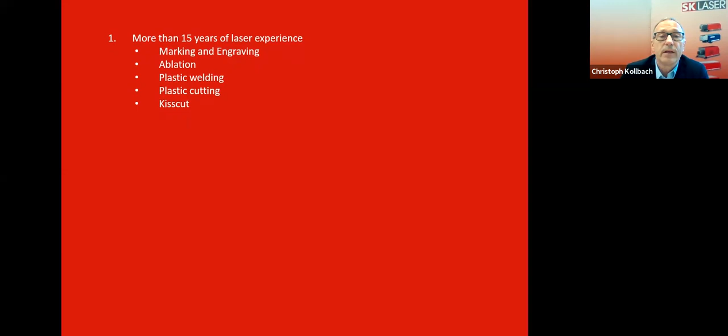Who is SK Laser? Well, there is more than 15 years of laser experience in marking and engraving, ablation, plastic welding, plastic cutting, and kiss cut. I will give more information about these lasers.

We provide industrial laser solutions like standalone machines, semi-automatic machines, and fully automatic machines. These are all made in Germany, and we are located in Wiesbaden, which is 15 minutes from the Frankfurt airport. And we do also deliver the machines to Israel, and we would give training and service, of course, with Ehud and his team.

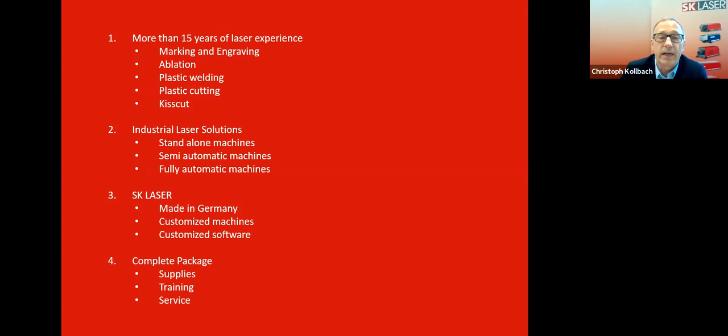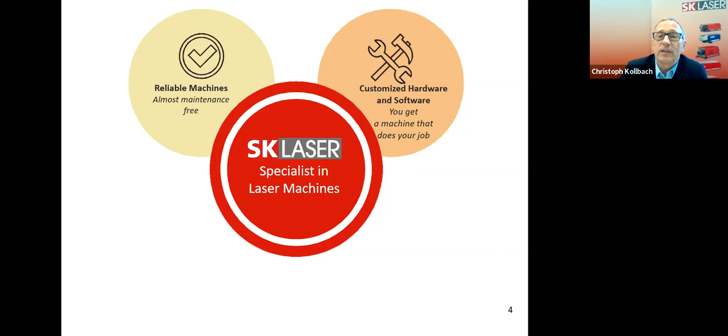So we are specialized in laser machines, and we are very proud that our machines do not break. That means we can deliver them worldwide and they will work. If you need some specialties, we can customize hardware and software so that you get a machine that really does your work. And the most important, it is very easy to use. You don't need a specialist, and you don't need much time to set up a new job.

Well, this is the countries where we have installations, and it's very interesting to see that also not only in Egypt, but in Sudan, there's somebody who bought a machine from us.

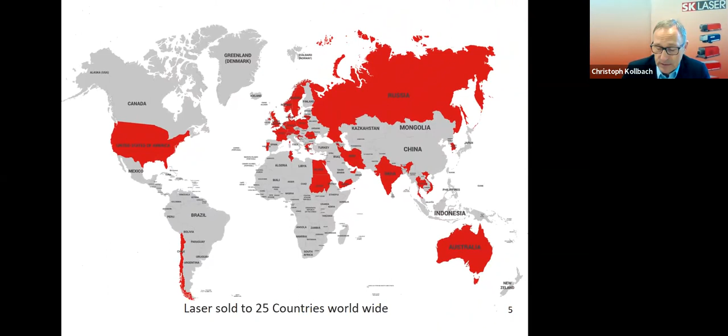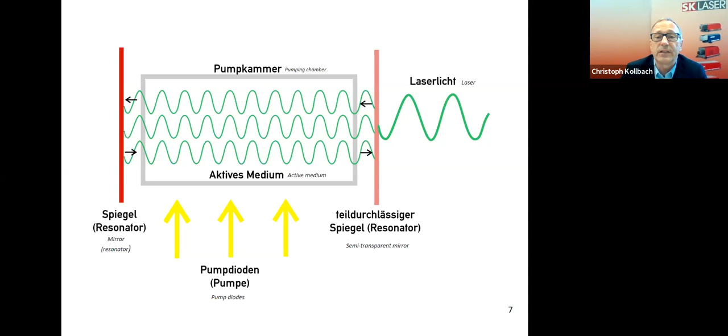How does it work? What is a laser? How is it working? I would like to give you a short introduction. In the center, you have this pumping chamber. It is the so-called resonator, and you pump some light into the resonator, and this activates the photons that start moving between two mirrors, and as soon as the media, meaning the light, the photons are strong enough, they would pass through the semi-transparent mirror and you would have the laser light.

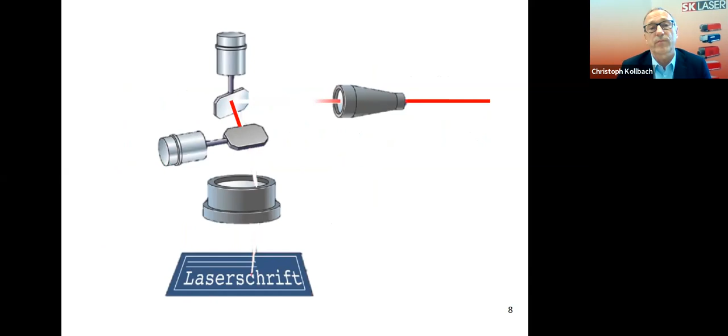As soon as this goes out, it would be directed to a so-called scan head, and the scanner has two of these mirrors, and these two mirrors guide the laser beam through a lens to the object that you want to mark or cut or other.

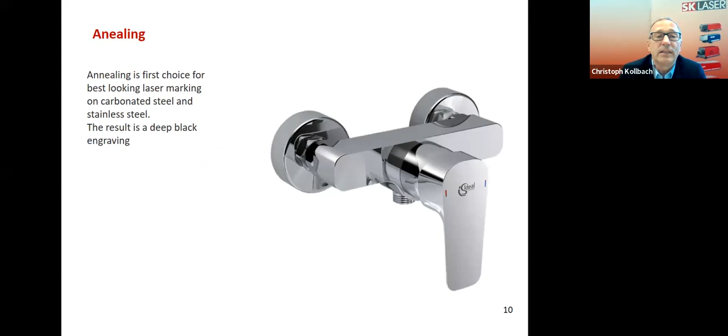Now I want to show some applications. This is interesting. It is a company you know, Ideal Standard. You know this big company. It is a location in Cairo in Egypt, and they bought a machine to mark a number like 1 million pieces per year. And I thought Mr. Mohammed should buy an automatic machine, but he told me labor is cheap in Egypt, and therefore he bought a manual one.

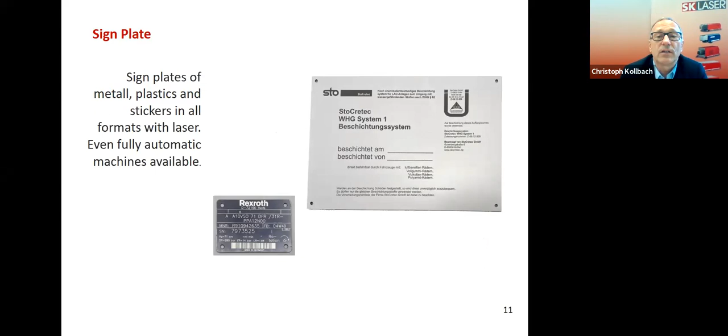This is a plastic marking for modern houses. It is a Bluetooth switch to switch off the light and something like that. And you can see a QR code and some data and a logo.

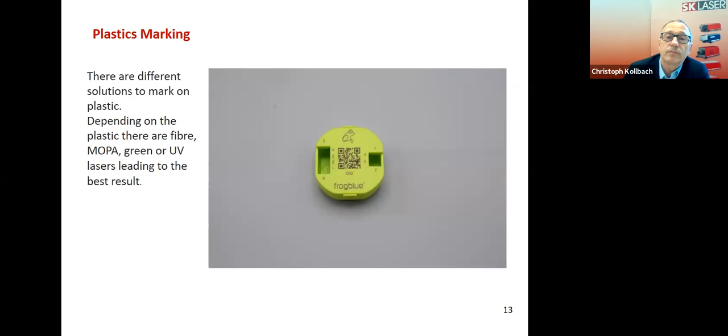This is a copper cable. Cable stripping is very common. You can do this with laser easily and very fast, and you need a lot of power depending on the time you have.

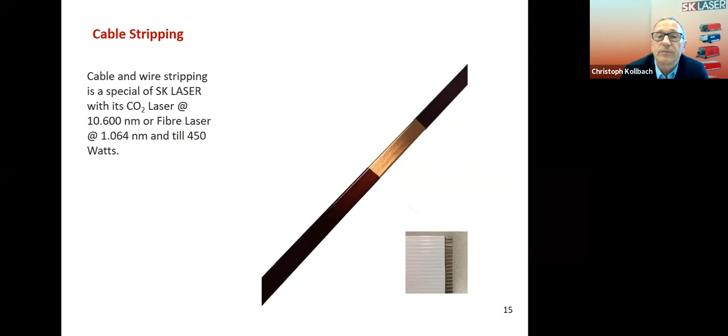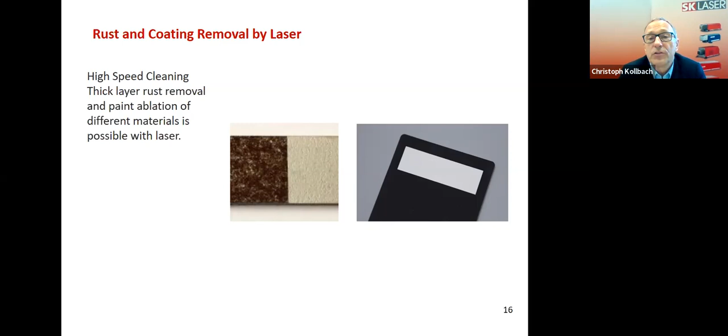This is similar. It is cleaning or rust removal on the left photo. On the right photo, it is just coating, which is removed with a laser.

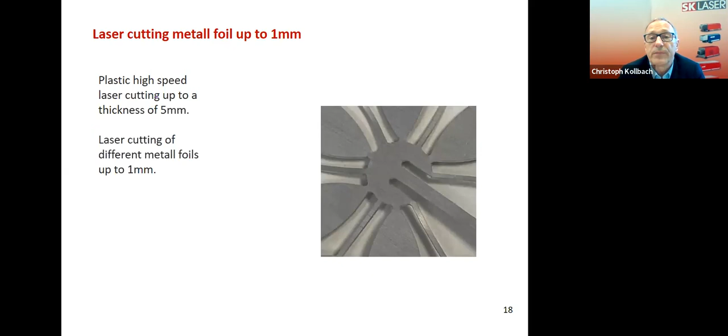Also, we have lasers to cut metal and plastic, but for metal, it is only very thin foil. It is not to cut big steel.

This is also for specialists, for places where you cannot reach the part and where you have to do ablation. Laser is first choice because laser could do flexible, deep, and very fast engraving, and we provide very strong lasers for this.

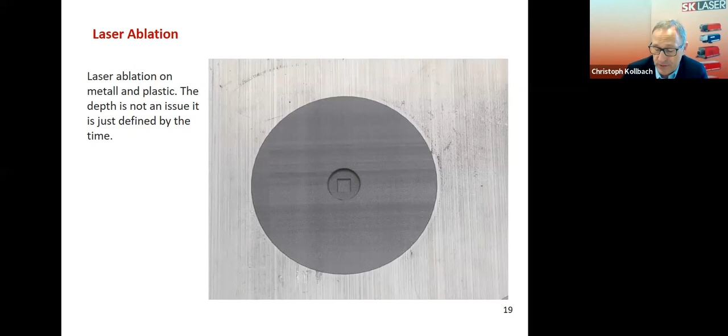This is a specialty: plastic welding. I can show you. This is a part used in automotive, difficult for me to explain, but when you enter your car and put the belt on, it makes a click, and the part that clicks is the silver one in the black.

It is a stainless steel ball, and they wanted to weld the white to the black without disturbing the white. This is possible with the laser because the laser goes through the white without touching the white plastic and melts both together, or welds them.

Another interesting plastic part. Can you explain a bit more about the welding, please? Yes, okay, let's go back. This one? Yeah, this one, okay.

With our fiber lasers, we can weld plastic parts together, but we need one plastic part which is like HDPE natural, so that this laser will not touch it. And the other plastic should be like, for example, HDPE but in black, so that the laser beam will heat the plastic and melt it.

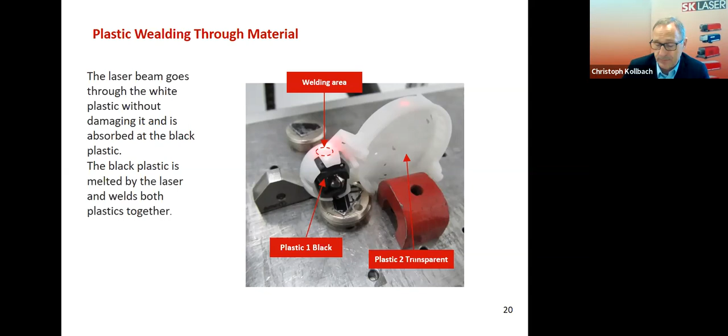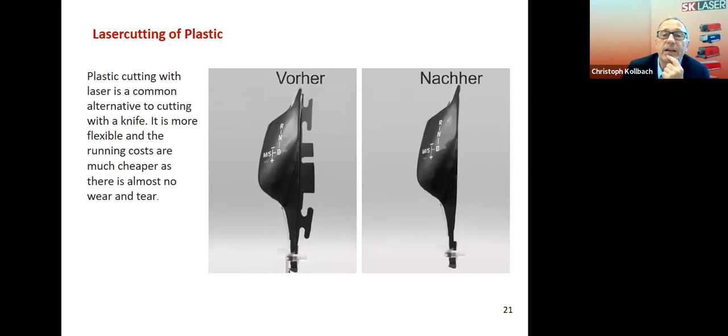And we have very powerful lasers, and we can provide full machines to do this process.

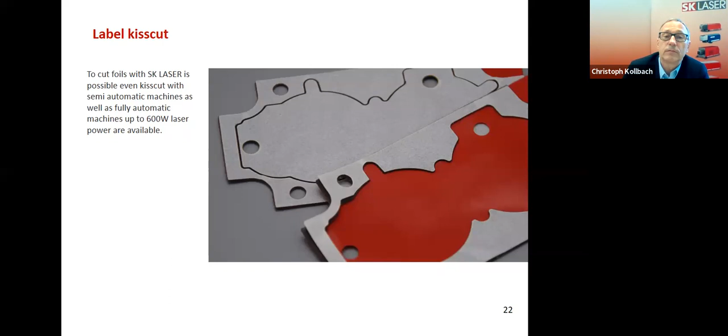SK LASER advantages: so we have a wide range of laser expertise. We can offer customized machines, and we do worldwide installation and training.

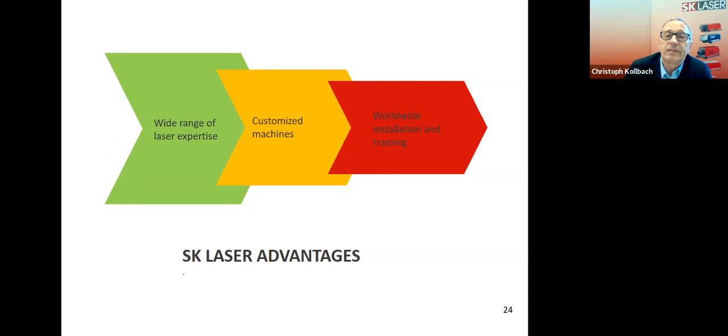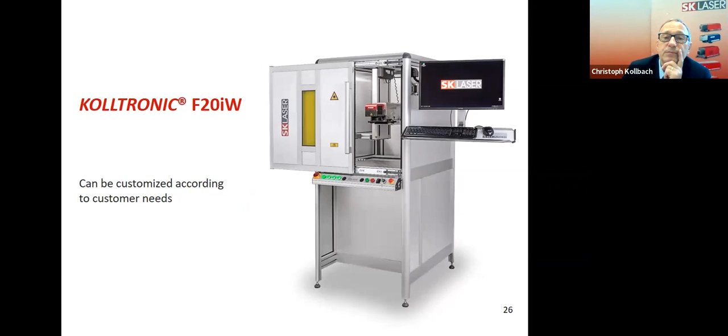So how does it look? This is our standard, let's say, which we can customize according to your needs. If you have a standard machine and the head is fixed, you can only mark at one point. But here with our machine, you can pull and push the head, which gives you more flexibility in the marking area.

There in the background, you see the Z-axis, which is not standing on the table - it is hanging under the roof, which gives you more space under the laser.

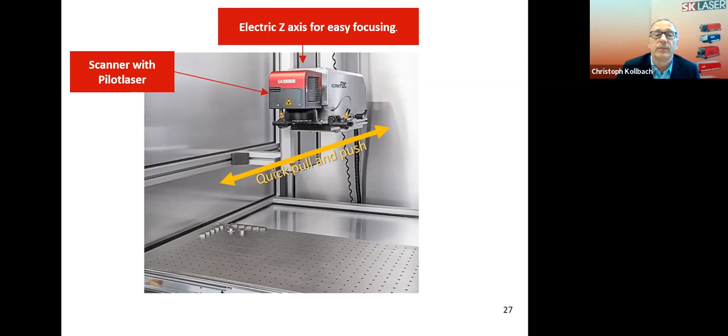This is the scanner, which you saw before, the little scheme with these 2 mirrors. This is 2 magnets and 2 prisms, for quick installation. For example, if you want an angle, you could take these 2 prisms and build an angle, or use the prisms to mark on a round part, like a drill bit.

The working plate, you can use magnets on it for quick installation. We also have these holes - the distance is 25 millimeters and the diameter is 4.1, so that our customers can build their own tablets for marking of several parts in a matrix.

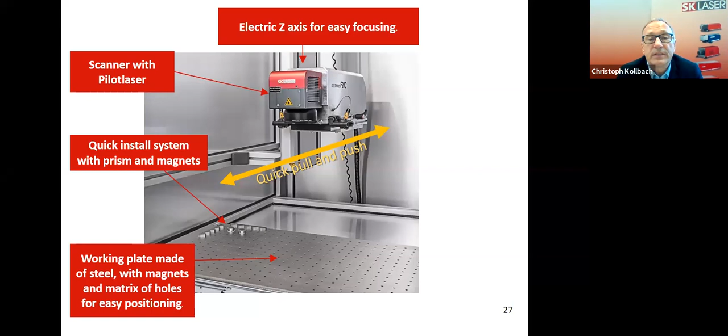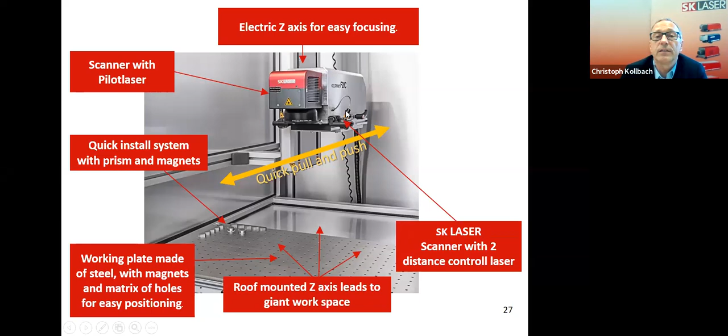This is what I said before, the roof-mounted Z-axis. We have 2 of these. Can you see these? This is a laser pointer. We have 2 of these laser pointers, one here and one here. With these 2 laser pointers, we can control the distance very easily with the Z-axis, you go up and down. And when you see one point, you have the right focus.

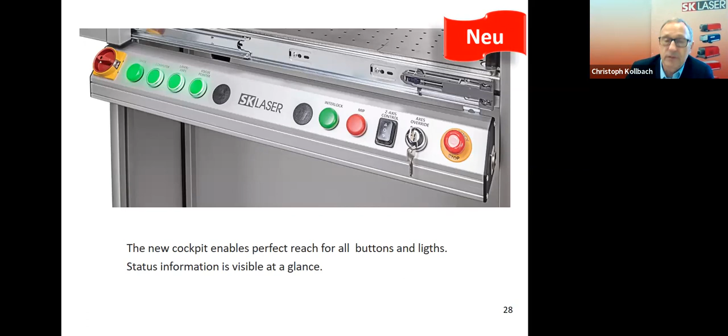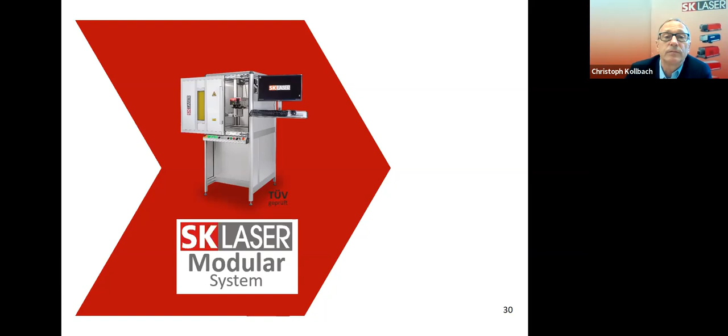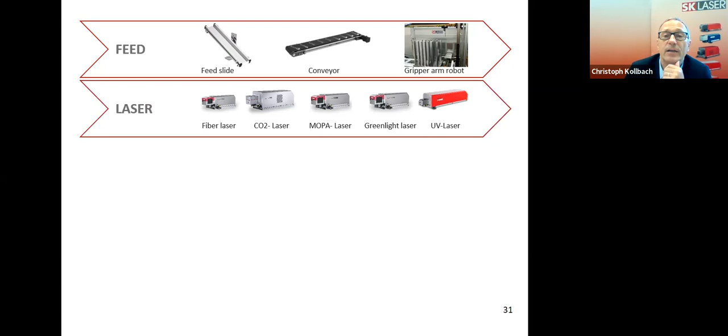And we have a lot of add-ons. If you want to install an automatic machine, you can have feed like a magazine, a conveyor, a robot, or a slide. We have different types of lasers like fiber lasers, CO2 lasers, MOPA lasers, green light lasers, UV lasers for all different purposes, and high power lasers for ablation.

You can order the cabinet in different sizes, depending on your parts. If you want heavy parts, you get a crane loaded machine. If you want to mark multiple parts, you get a sledge or a tunnel, and so on.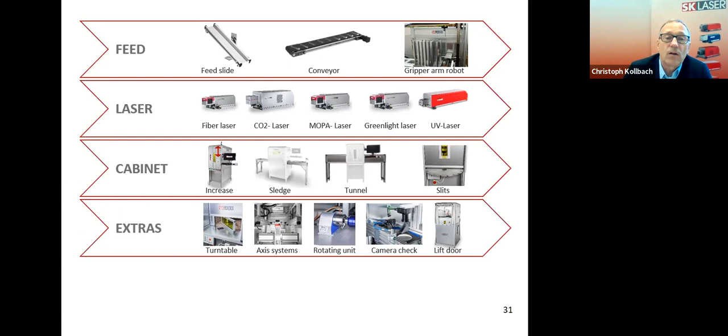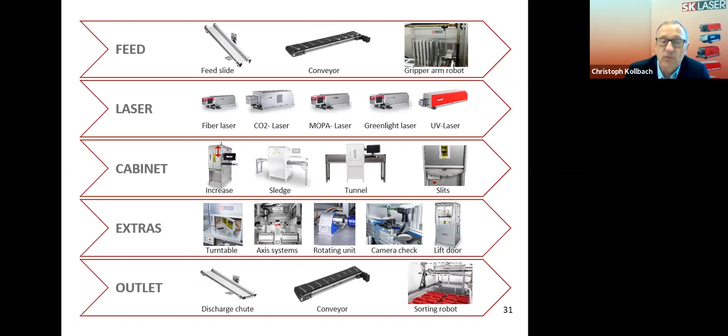We provide all extras which are common in the machinery business, like turntables, axis systems, rotating units, cameras for checking, pneumatic or electric doors, and of course conveyor or a sorting robot at the end. This leads to fully automatic machines, small ones and big ones.

I will show some video to you and show some machines again.

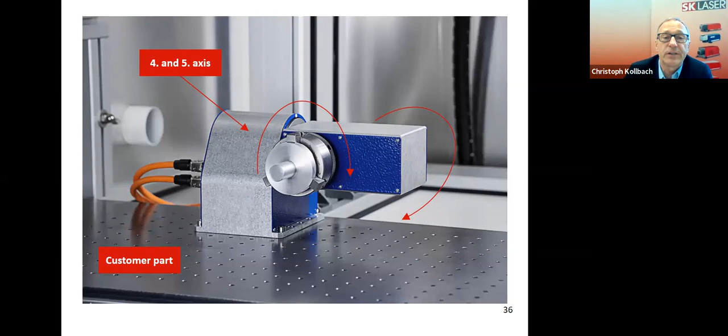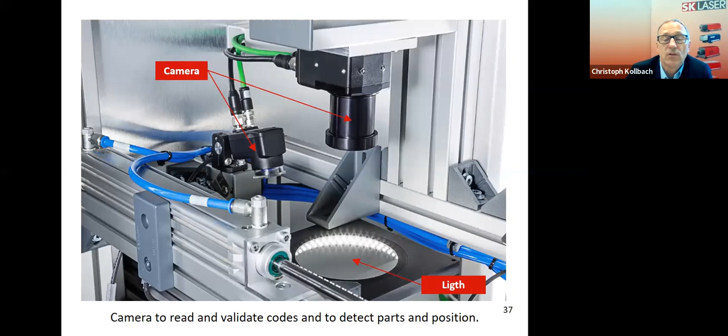This is the 4th and 5th axis, which goes automatically with the software, so very easy to use. This is a camera system that can control data matrix codes after you have marked the data matrix code, or you can control the position of a part.

Mr. Christoph, just one question before.

Is the welding machine also able to mark on parts? Yes, it is. Yes, the welding machine is, let's say, the standard fiber laser. Okay, thank you.

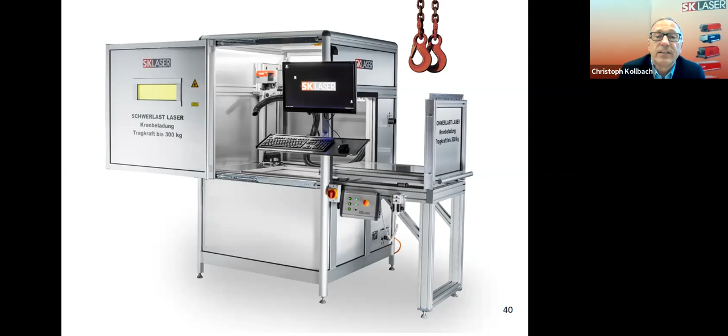Now I want to show this. I have prepared a little video, just watch it.

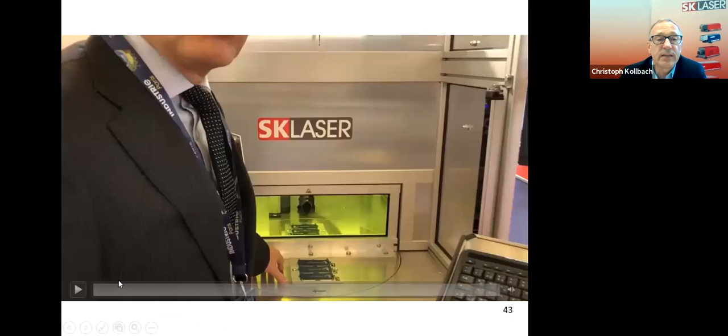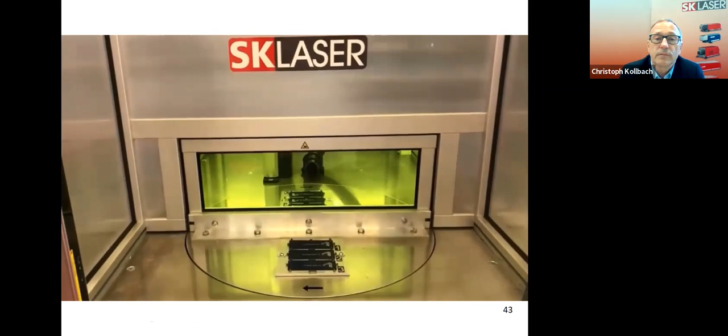It was on an exhibition in France, yeah. It's marking some signs over there.

Okay, now we have a machine with conveyor belt, different conveyor belts. I have one example prepared for you also.

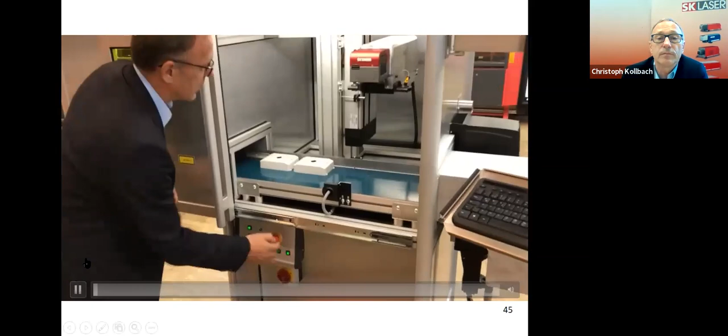It starts moving. Here you have the optical sensor. I have to close the door now, please watch it through our laser safety window.

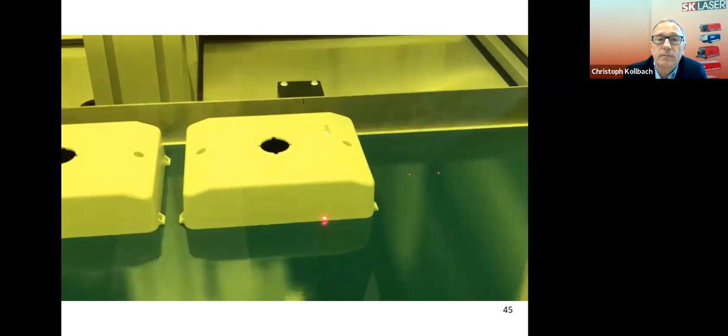First part is marked, and it is marking on the fly. That means it is marking while the machine is running and the parts are moving. Now it has detected the second part and it is marking.

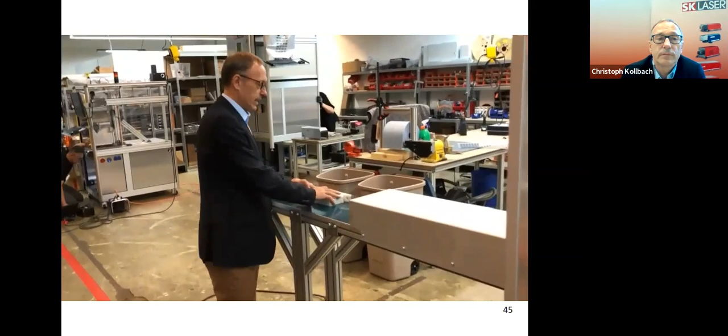So the feeding of this machine is quite simple. In this case, the customer wanted to. Okay, yeah, you put this just to the white side and it moves automatically into the machine, is detected and marked.

Mr. Christoph, can you explain about marking on polypropylene and PET?

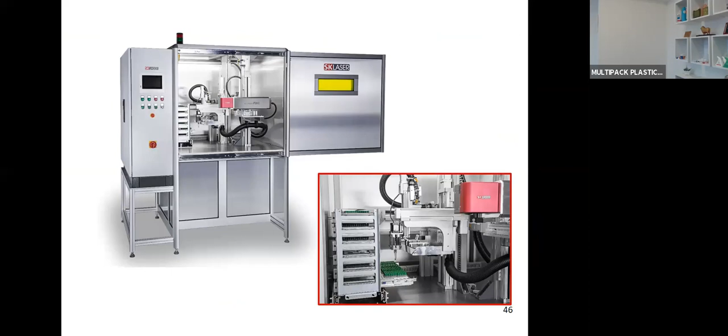Well, we can mark on polypropylene and PET. PET is excellent to mark. Polypropylene depends a little on the type and especially on the color. We have to test it, but PET is possible and gives excellent results normally. Okay, thank you. Yes.

This is a fully automatic machine to mark the tubes. You have storage here in this machine about 2,500 tubes, and it is pulled outside, and a little robot takes one tube here and goes to the laser machine, and here it will be marked with an EAN code on the side of the tube, which is a plastic side. So it is a plastic marking machine for small parts and it's fully automatic.

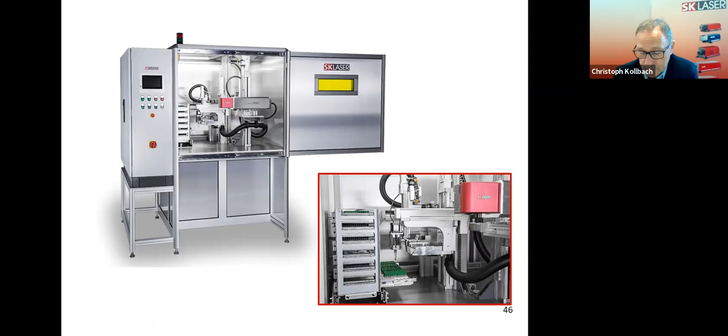This is also a fully automatic machine. It can mark all different parts. It is our standard machine.

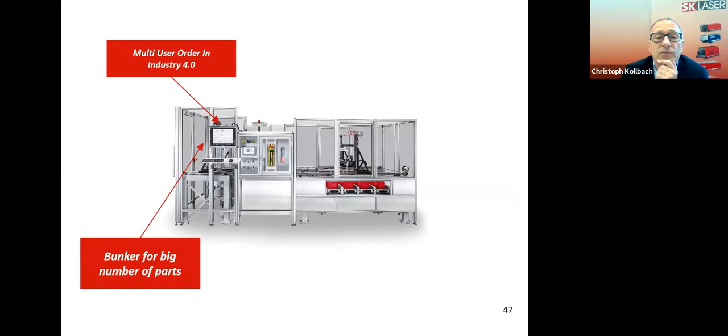Here you have multi-user order in Industry 4.0. You have a bunker for a big number of parts. In this case, it was for the Deutsche Bahn, the German railway. They wanted to mark a lot of sign plates, but it could be sign plates or other parts. And the transport unit, storage.

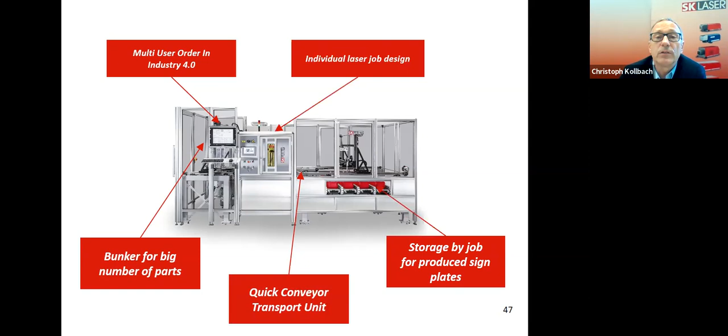Okay, we'll show you a little video. Here it starts. It's a little loud, excuse me.

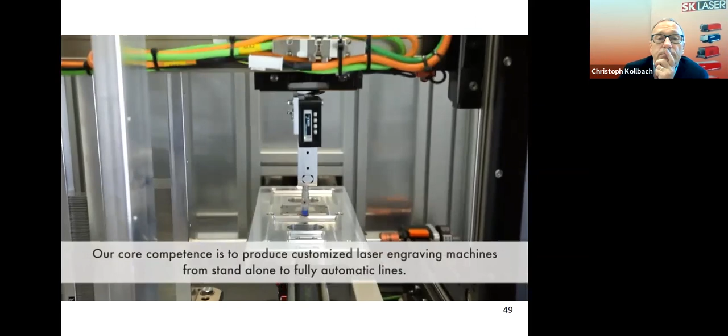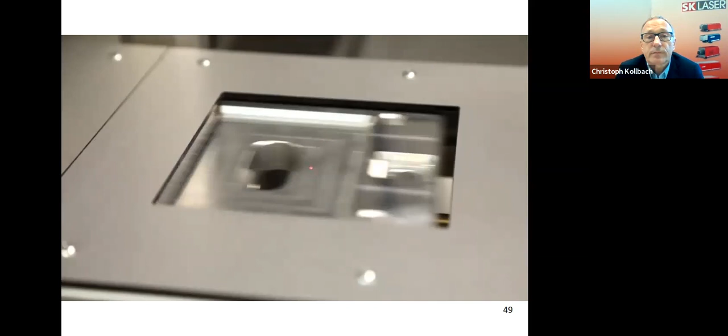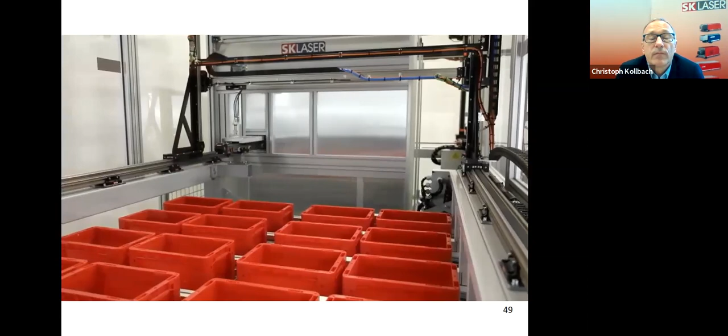So we put the sign into different geometries. It's controlled by a Siemens SPS. This marking is called annealing. We can mark on stainless steel, and steel we can mark in black. And afterwards we sort these plates into orders.

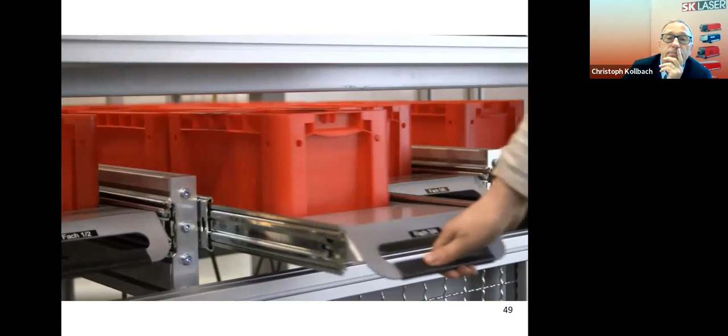Okay, I showed these three little videos to show how lasers work, and you see it is not much to see because you cannot see the laser light, but it works, believe me.

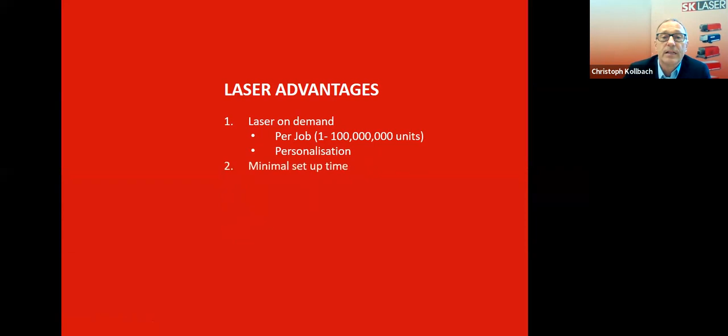Okay, the advantages of the laser compared to printing units is the personalization, and you can mark laser on demand. That means you can print one unit easily. Minimal setup time and very few costs, because you only need power, and the standard laser needs only 400 watt, which is a third of a toaster. And constant quality of print.

And we mark contactlessly with different settings if you like. Inline and offline solutions are available.

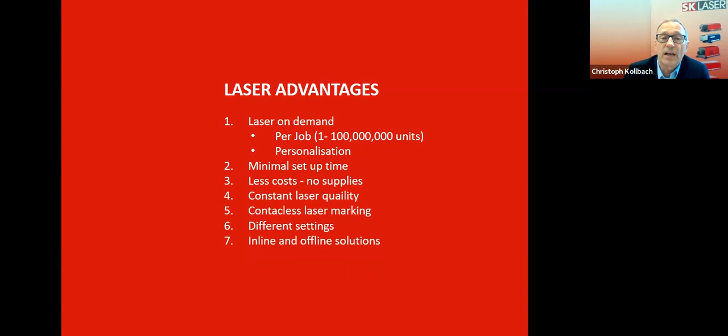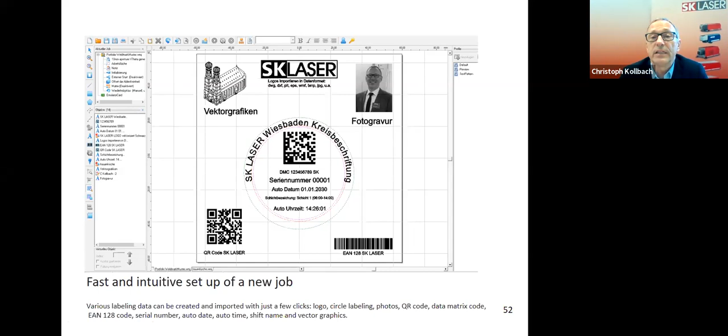I would, if you're interested, I can show you the software, and believe me, it is really easy to use. Also, if you like, if you need, we can set up special programs.

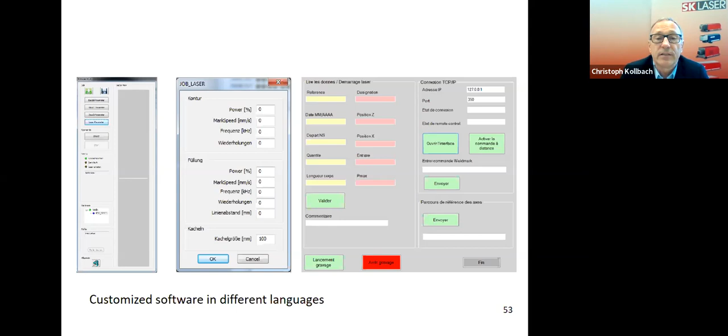This is for a French customer. On the right side, you can read some French words. So we translated everything into French language, and that's a special program just for the customer.

Mr. Christoph, please. Regarding also cutting, can the same machine cut, mark, and weld?

No. For cutting, it is a totally different laser. We need a CO2 laser and more power.

Can you explain a bit more about the cutting laser? Yes, okay, let me show this slide, and the next slide I will show some cutting lasers, okay?

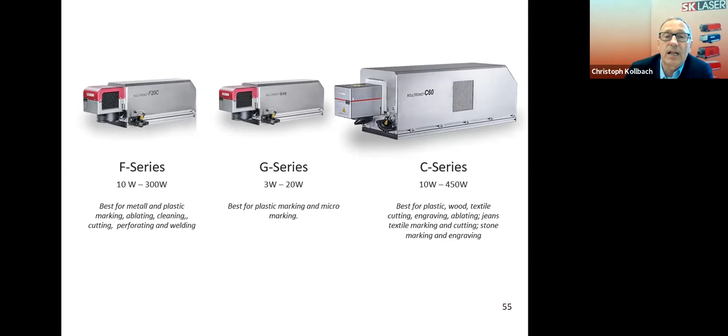Any more questions for cutting, Ehud? Yes, regarding, I don't know if cutting, but on round surfaces, about marking on round surfaces, what is the diameter that is possible? Okay, not turning the part. Yes, okay.

When I showed the standard workstation, I showed the space, and our workspace under the laser in the standard machine is 400 millimeters by 710 millimeters, which means you can put big parts under the laser.

The working area of the laser itself depends on the lens. When you look at these laser heads, you see the scan head, and on the scan head, you see something black here and here. This is the lens, like a lens at your photo camera. You can take it off and change it to one with a long focus or short focus.

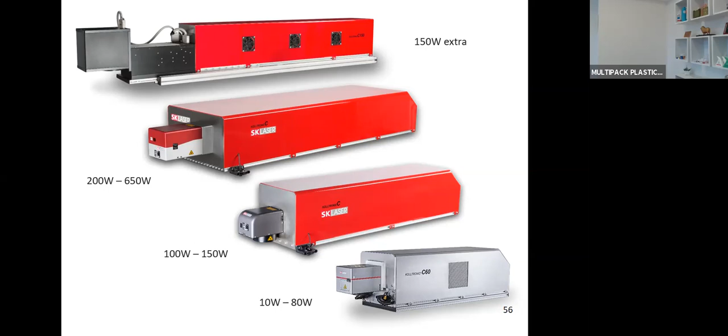And is it possible to add like a shaft that rotates the object? Yes, I will go back to a slide and show you.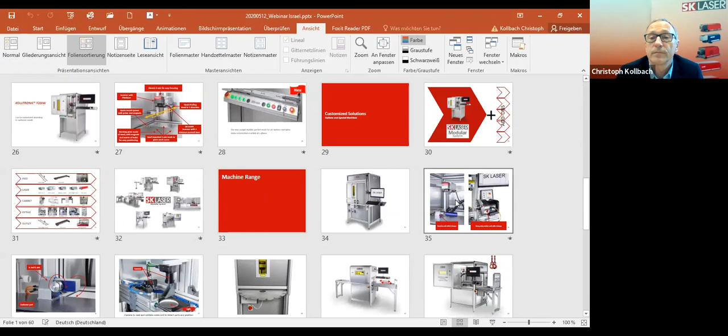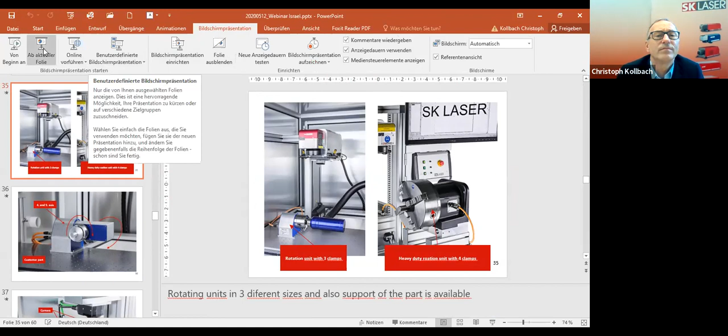So, can you see this? This is what we call a rotating unit. On the left side, you see a rotating unit with 3 clamps that goes up to a diameter of 60 millimeters. On the right side, you see a bigger one that goes up to 125 millimeters. And there is a third version, which is very heavy, for bigger parts. The software, which you see on the top written SK Laser, controls the rotating unit, and it works like: you mark and it turns, you mark and it turns. So you mark, turn, mark, turn. That is how the software controls it.

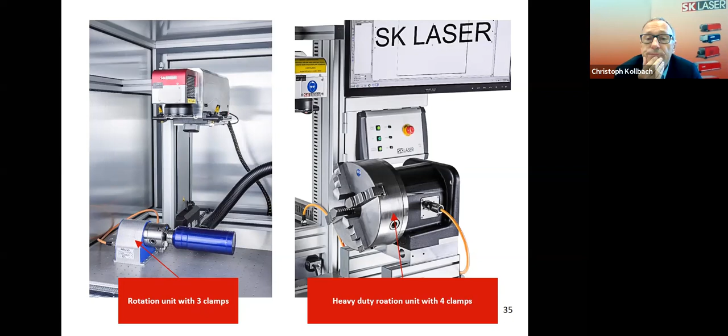Ehud, is that okay? Yes, we have another question. Regarding polypropylene, can you explain a bit more about polypropylene objects, the markings, the problems, the solution?

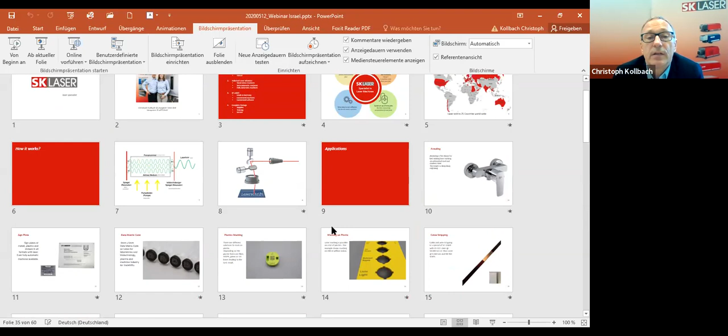Yes, okay. Well, this is ABS. I don't have polypropylene here. I know that polypropylene is not very easy, it is not the best to mark on, but you can mark on polypropylene, maybe with a special laser. The tricky thing with special lasers is they are much more expensive than standard lasers. Let's talk about the UV laser. UV laser might be the best laser to mark on plastic, but it costs up to 100,000 euros or more, and most people are not willing to pay so much money for the laser, which is why they search for other solutions.

Another solution that always helps with all plastics is to put some laser additive into the plastic before you produce your parts. Can I ask the customers whether they are familiar with this, or shall I explain it again a little deeper?

Sorry, I didn't catch it, can you repeat? I can repeat, okay. I want to introduce the laser additive. Laser additive is some special material which your customers can put into the plastic when they produce the plastic parts, so before they melt, they can put this into the plastic. I would like to ask if they are familiar with this process or not.

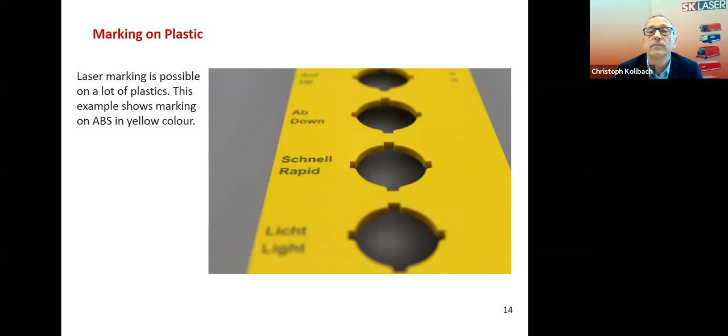Okay, let's go back. So, we're almost done.

As I mentioned before, we do installation training with the help of our Israel friends, Ehud. I'm talking about you, but we're there to help, and we can do this via the internet and so on. This is some sort of sea or air freight packaging, a wooden box. Inside you have a vacuum inliner around our machine so that it will not be damaged by cold air from air freight, or salty mist from sea freight.

Here in Germany we deliver with our own cars, and we love to do installation and training because it is always very nice to see how much fun it makes to use this machine. Easy installation, short preparation time, very low running costs, environmental friendly. I want to say this is very important these days. Why? Because we don't use any solvents, we just have the laser, and it consumes very low power. So from the environmental point of view, it is very friendly.

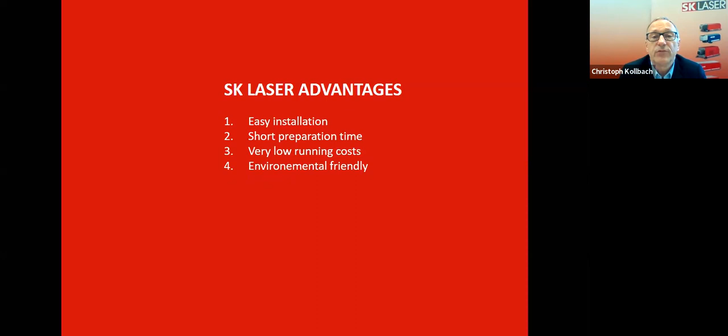Can you explain a bit, do you have experience with supermarket boxes, to mark like data matrix? Data matrix code is very easy, but what do you mean by supermarket box? Like crates used for vegetables. Yes, it should be easy, it just depends on the plastic. It's always a bit different because plastic varies, so the best is really to make a little test and see how it works. In most cases, with data matrix or EAN code, it's very easy.

If you like, I can show you a scanner. Here on my mobile phone I have a scanning device, and I will get one example.

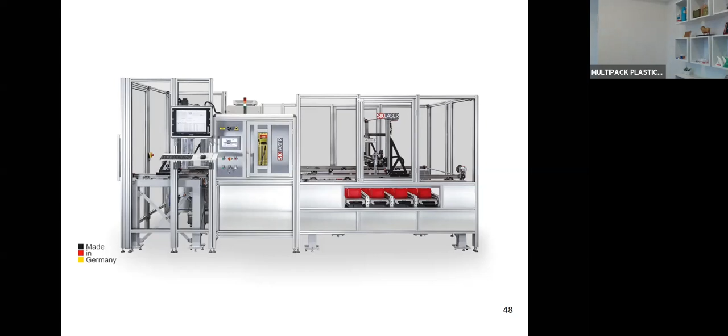Can you explain a bit, until we get the question, about the process of defining a machine solution? Yes, okay. The first step is that we make a sample, because when we produce a sample, I, Christoph Kollbach, can see whether it works, whether it's easy or not easy, so that I can give some idea to you. And when you see the result on your part, you say okay, yeah that's good, I like it, it's okay. If you don't like the result, you can forget about it.

So the sample is really very important. After we have made the sample, we have to discuss how many pieces you need to mark. If it's, let's say, 1 to 500 parts per day, and the number of jobs is 1 to 5 parts of the same part, with many different jobs, this would lead to our standard machine. But if it is a bigger number, or if it's every time the same part for a week or longer, we may think about an automatic or semi-automatic solution.

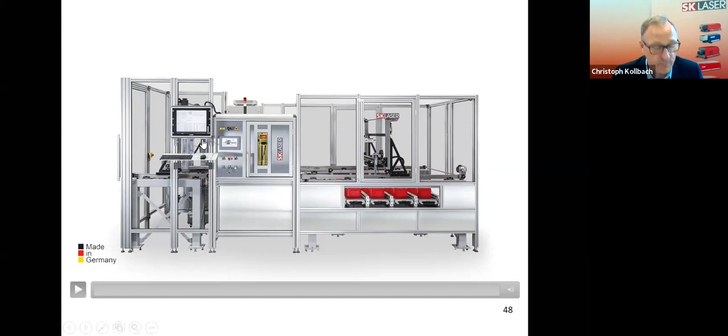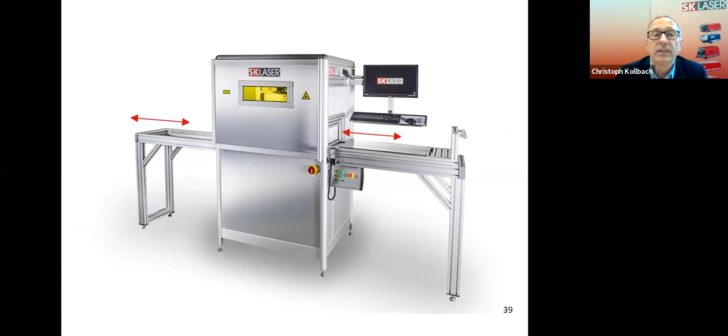I want to go back to another slide and show you the semi-automatic solution. This one is not very expensive because you only have this 2-position slide, which gives you the chance to laser inside and to load and unload outside, much cheaper than the rotating table version. I'll show this one again. The rotating table version costs something like 55,000 euros. From the control and electronics point of view, it is highly sophisticated, let's say, it is much more work for us to produce it. Therefore the other version with the manual sledge is much cheaper.

So after you have decided how big your parts are - this is also an important point - let's say the parts are not heavy but not very small, we have to think about it, and if you want to produce a mass of this, you have to think about an automatic version. And I have a version like this one.

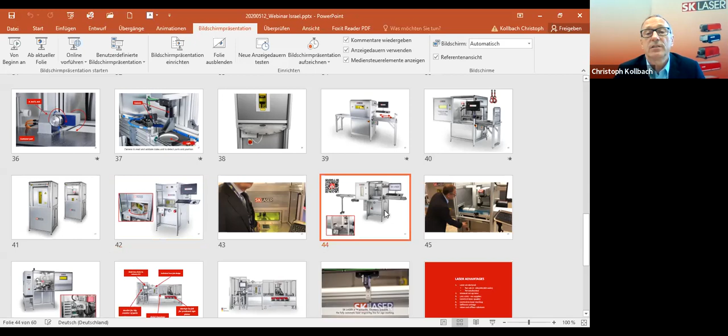This is a more than 6 meter long conveyor belt, designed to mark very, very long parts. The customer wanted to mark on 6 meter long parts, so we had to build this laser to mark the whole part from the very beginning to the end, not just on the top or in the middle or at the end. So if some of your customers have an idea, you can give me the details and I can discuss and give some suggestions.

Okay. For now, I have a different question. Please, go ahead.

Regarding durability of laser marking to weather conditions like UV, rain, etc. Normally, the laser process is, compared to other machines, a clean machine. Regarding dust, you can have a lot of dust if you cut plastics, it makes a lot of dust and stinking. But if you mark on steel, it can be a very clean process.